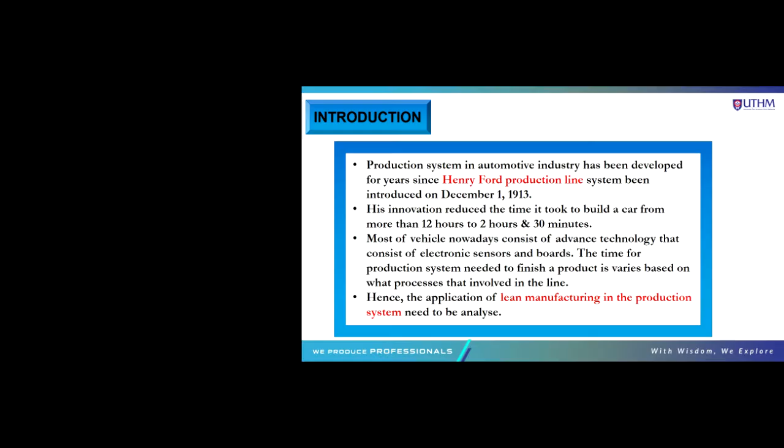For the first slide is introduction. What we mention in introduction is production system in automotive industry has been developed for years since Henry Ford's production line system was introduced on 1st December 1913. His innovation reduced the time it took to build a car from more than 12 hours to 2 hours and 30 minutes. Most vehicles nowadays consist of advanced technology including electronic sensors and boards, and the time needed for the production system to finish a product varies based on the process involved in the line. Hence, the application of lean manufacturing in the production system needs to be analyzed.

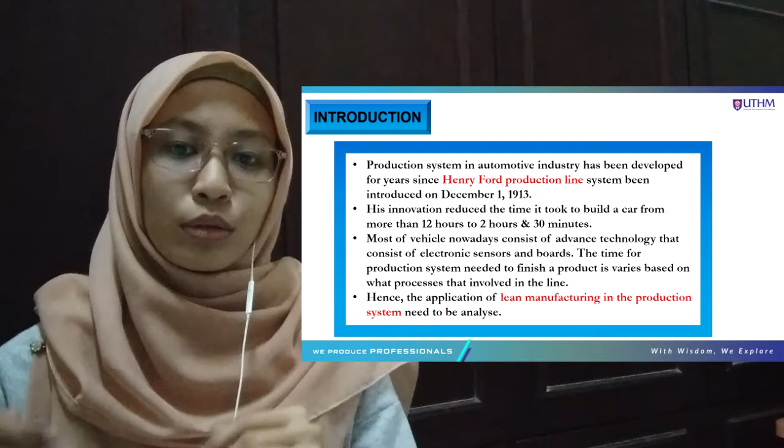For the next slide is background study. The aim of this research study is to learn the process involved in the production system in automotive industry from the initial stage of production until it finishes, which is mass production. So all the knowledge of how automotive vehicles are systematically mass produced and its relationship with the principle of lean manufacturing will be explained in detail in this slide.

Next is the objective of this topic. There are 3 objectives. First is to define the production system in automotive industry. Second is to state the process involved from the initial stage to the final stage, which is mass production. And the third is to examine the importance of the principle of lean manufacturing.

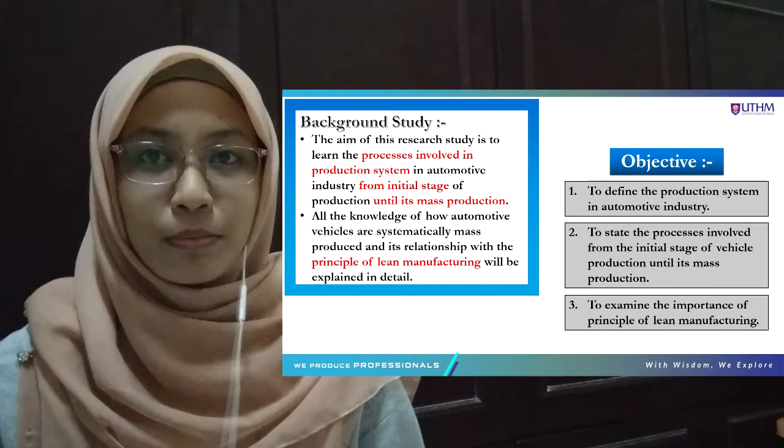Vehicle production system process. The manufacture of motor vehicle involves the manufacture and assembly of the final product from a number of metallic, plastic and electrical components. A wide range of processes are involved, including metal cutting, pressing, polishing, grinding, welding, and painting.

As we can see in the picture, this is the animation on how the assembly line in automotive industry will run. First, from plant and equipment relocation to the press shop, from press shop to the body shop, from body shop to the paint shop, and at the same time the powertrain shop or engine shop is assembled, and then the last one is final assembly.

The BMW 3 series has been chosen as our reference to explain all of the processes involved in automotive industry. The BMW Group offers premium emotion, exceptional automobiles which are characterized by high quality and outstanding design.

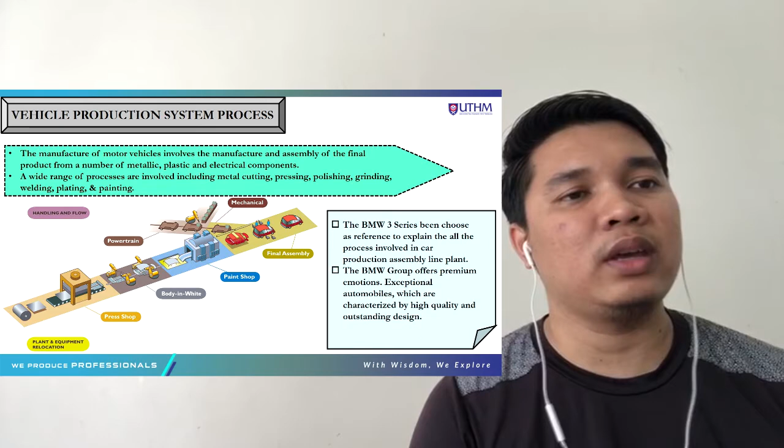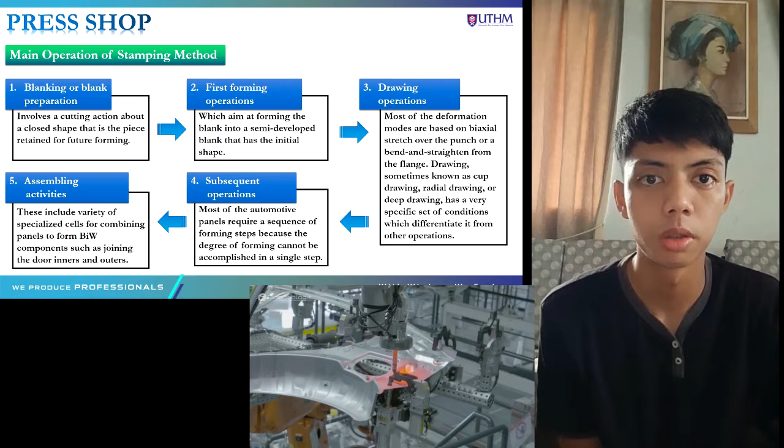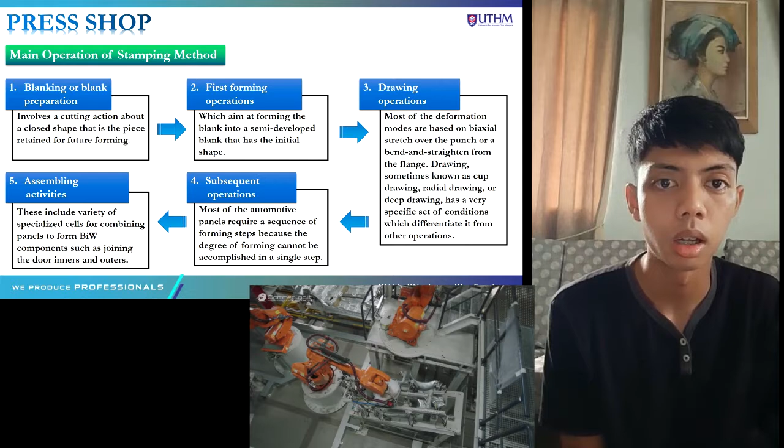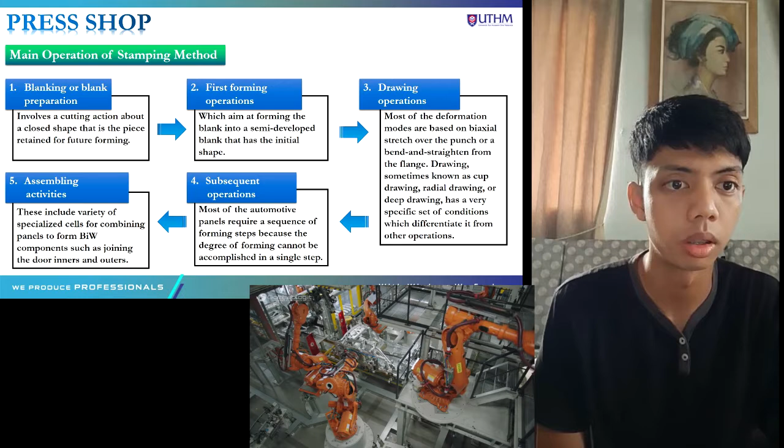The first press shop main operation is the stamping method. For the stamping method, there is blanking or blank preparation, first forming operation, drawing operations, assembling activities and subsequent operations. The first is blanking, which involves a cutting action to create a closed shape for future forming. Next is first forming operation, where the aim is forming the blank into a semi-developed blank for the initial shape before the drawing operation, which consists of what is sometimes known as cup drawing, radial drawing or deep drawing, each name having a specific set of conditions which differentiate it from other operations.

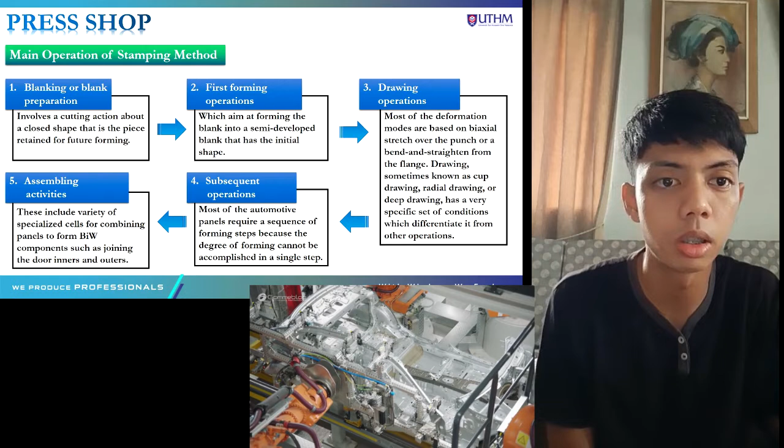The next is subsequent operations. Most panels require a sequence of forming steps because the different degrees of forming cannot be accomplished in a single step. The last one is assembly activities, which include a variety of specialized cells for combining panels to form the BIW component, for joining the door inners and outers.

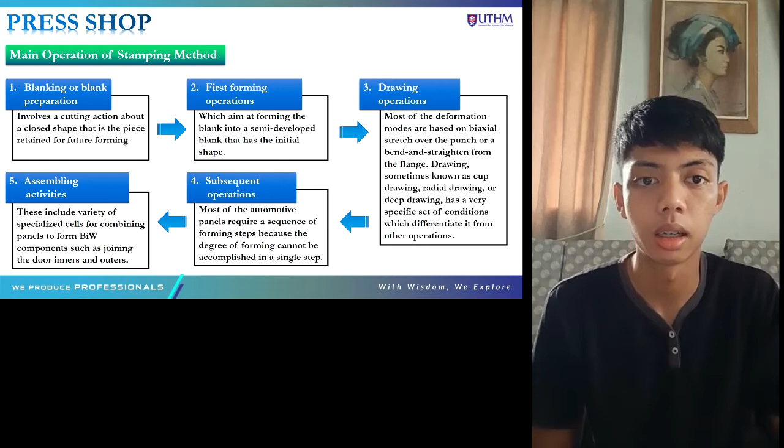In press shop, there are two types of press shop in automotive: the first is mechanical press, and next is hydraulic press. For mechanical press, it uses energy stored in their flywheel, which is translated into reciprocal motion. They also come in different configurations, which is press with gap frame and press with straight side.

Next is hydraulic press. They control their force which moves one or more rams in a predetermined sequence. Due to the large bed size, it provides full tonnage at any point of the stroke. The hydraulic press covers a wide variety of applications, so it is organized according to the operation on the part in various line configurations.

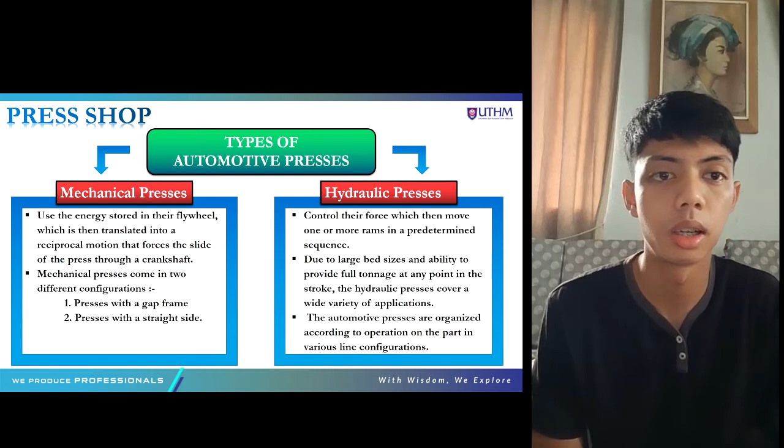So body shop is the next process after press shop. Body shop is different because it is meant for precise assembly to precision body, compared to press shop, which is preparing material for its initial shape from the sheet metal blank.

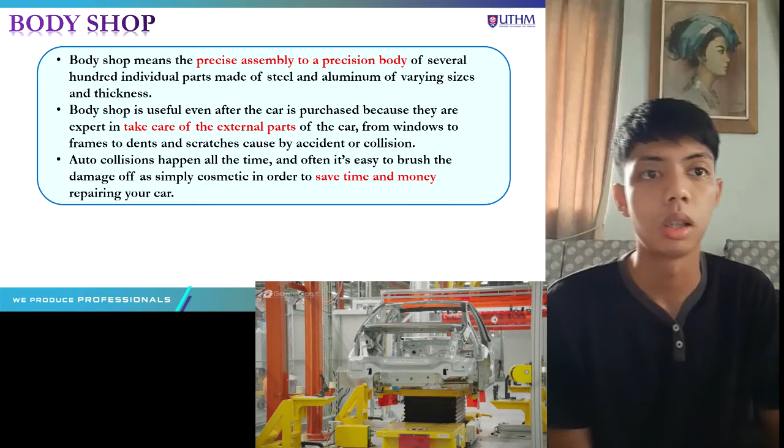Body shop is useful even after the car is purchased because they are expert in taking care of the external part of the car, which is the outer area. Auto collisions happen all the time, so it is not avoidable. In order to save time and money, we can simply use simple cosmetic repair by body shop for repairing the car.

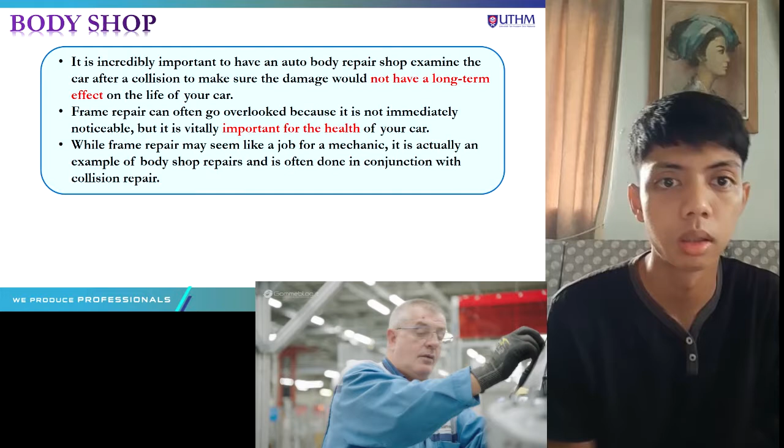So what is important about body shop? It is important to have an auto body repair shop examine the car after a collision to make sure that the damage does not have a long-term effect on your car.

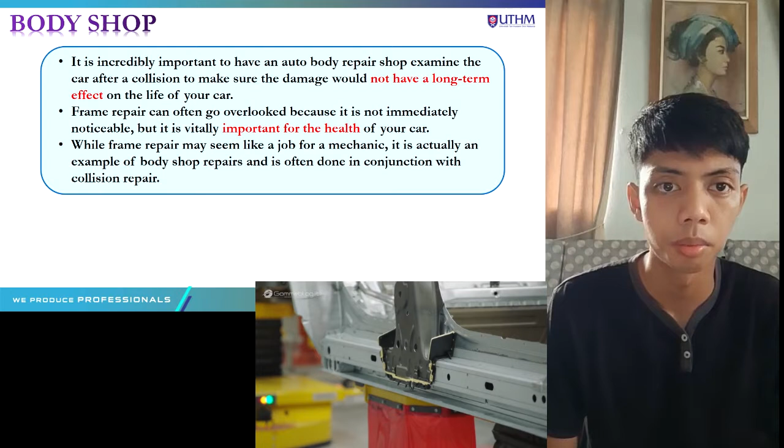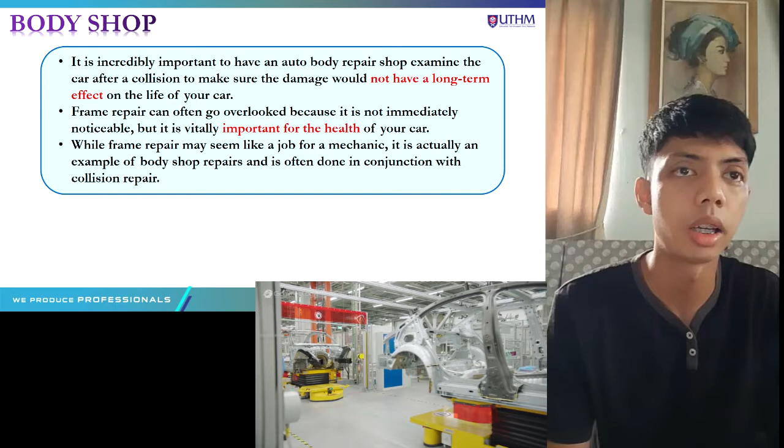Frame repair can go overlooked because it is not immediately noticeable, as it is on the interior side. Yet it is vital to the health of the car. While frame repair may seem like a job for a mechanic, it is actually an example of body shop repairs, often done in conjunction with collision repair.

Engine shop. An engine is a machine designed to convert other forms of energy into mechanical energy. There are different types of engines, like heat engines, internal combustion engines, external combustion engines, non-combusting heat engines, and chemically powered non-thermal engines, to name a few. Most of these engines are complex and heavy, which makes them difficult to make or build.

An assembly line is a manufacturing process in which you can produce an end product faster and with more efficiency. In this process, individual parts are added to a core product in a sequential manner to create the final product.

Automated assembly lines for engines have even found their place in the jet engine industry, where until now the engines were assembled almost completely by hand. Today, even automobile engines have become more complex, while workers demand more reliable and safe assembly processes. This demand has led assembly lines to gain great popularity in various automobile manufacturing companies.

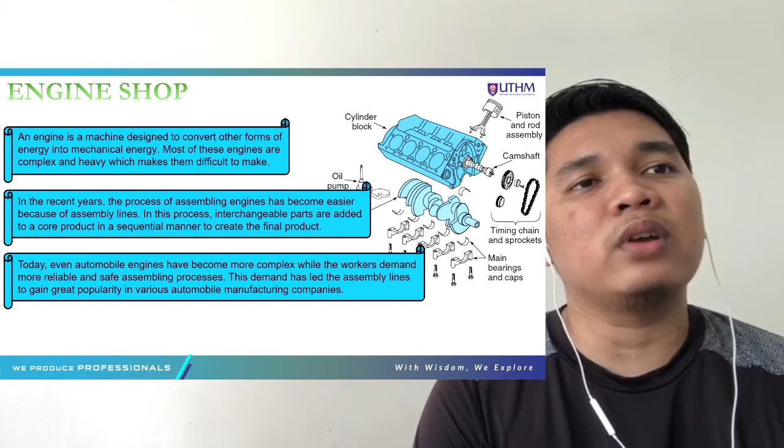The assembly line for engines has four major blocks essential to the engine. The first is short block assembly. The short block consists of the portion of a cylinder block from below the head gasket to above the oil pan. The cam-in-block engine also consists of the camshaft, balancing shaft, and timing gears along with the cylinder block. At this station, the short block is put together from all the individual components and then sent on.

The second is piston sub-assembly. This block contains the individual items required to assemble a piston. The main components of a piston are lands, heads, ring grooves, and skirts that are mounted on a wrist or piston pin. Though the structural components stay the same, the piston can differ in the shape of the heads or the placement of the rings.

Third, cylinder head assembly. The cylinder head sits on top of the cylinder block and provides space for the passage of air and fuel to the cylinder. In some cases, valves, fuel injectors, and spark plugs are also mounted into the cylinder head. All of these components are mounted at this station and then sent to the next station.

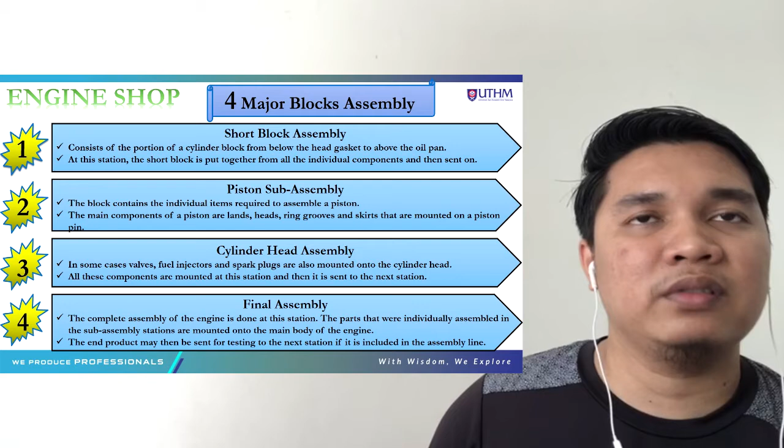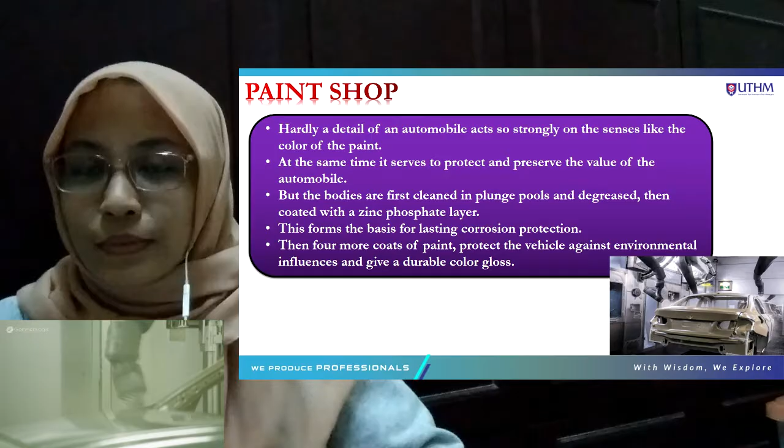The assembly line has various advantages apart from increasing efficiency and productivity. The line also makes mass production of products, even as complex as engines, easier, and also helps increase the company's throughput. So for the next slide is paint shop.

Hardly any detail in an automotive is noticed as strongly as the color of the paint. At the same time, it serves to protect and preserve the value of the automobile.

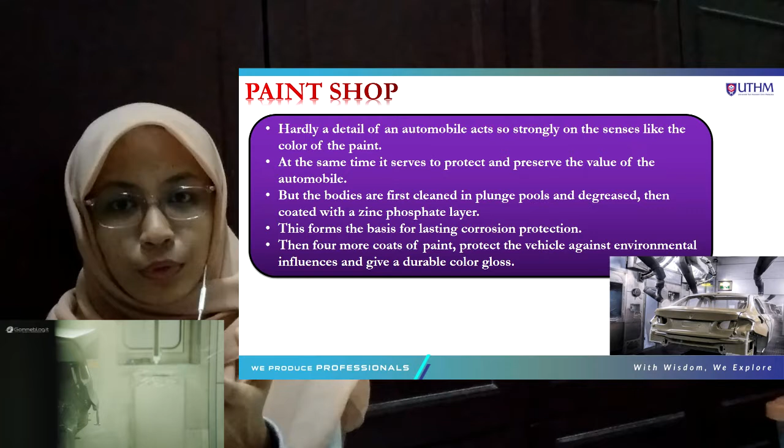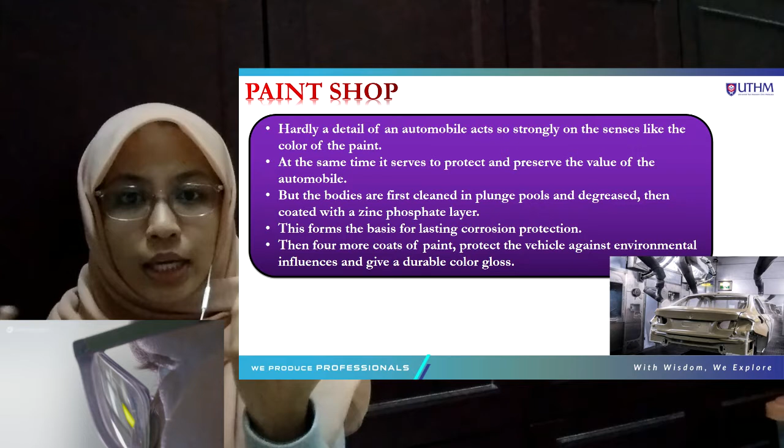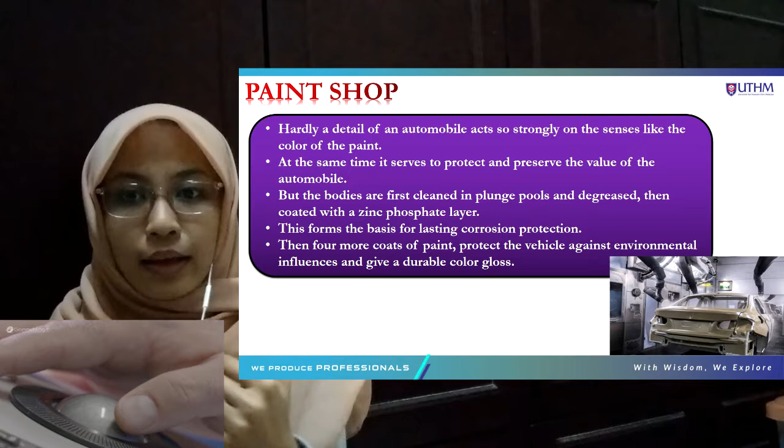The bodies are first cleaned in the plunge pool and then coated with the zinc phosphate layer, which forms a basis for lasting corrosion protection. Then 4 more coats of paint protect the vehicle against environmental influences and give a durable color gloss.

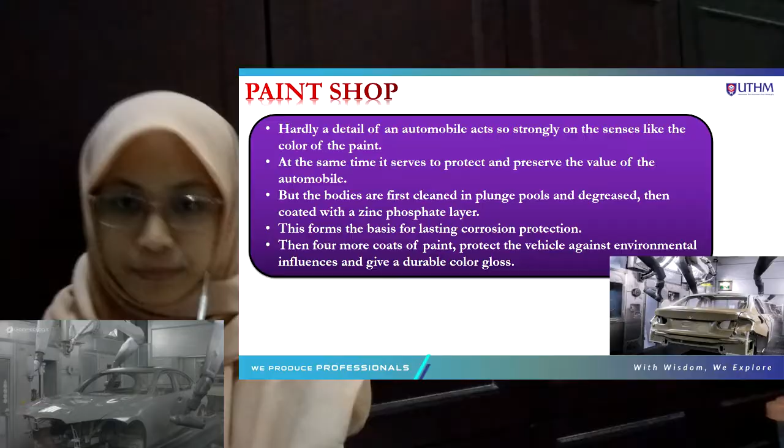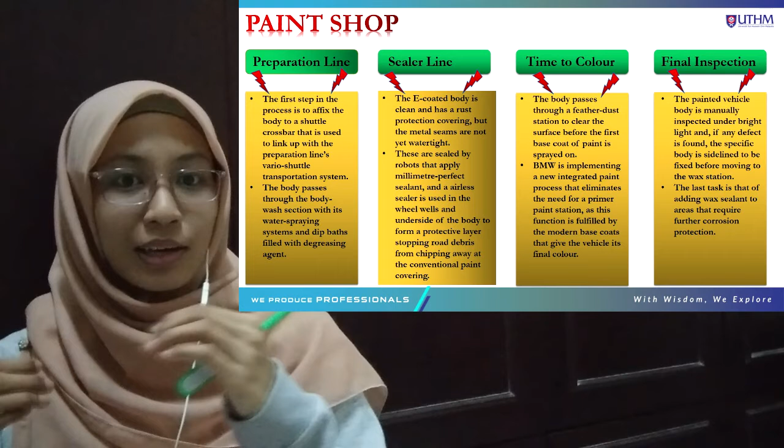So for the next slide is paint shop. The first process in paint shop is the preparation line, and the first step is to affix the body to the shuttle crossbar that is used to link up with the preparation line's vario-shuttle transportation system. The car runs on a track that allows the individual body to follow the path.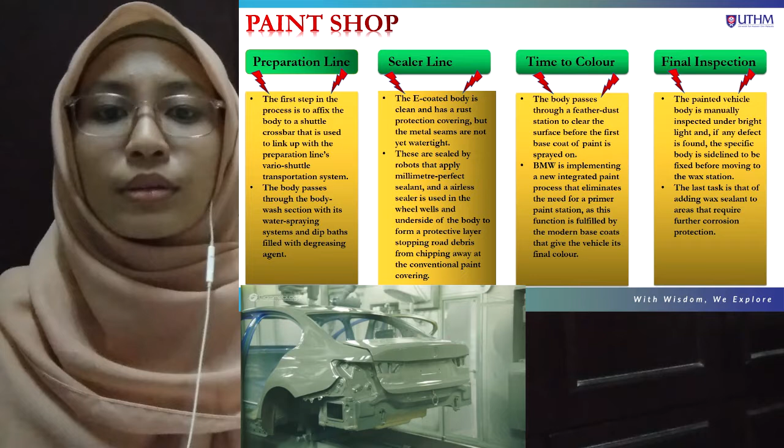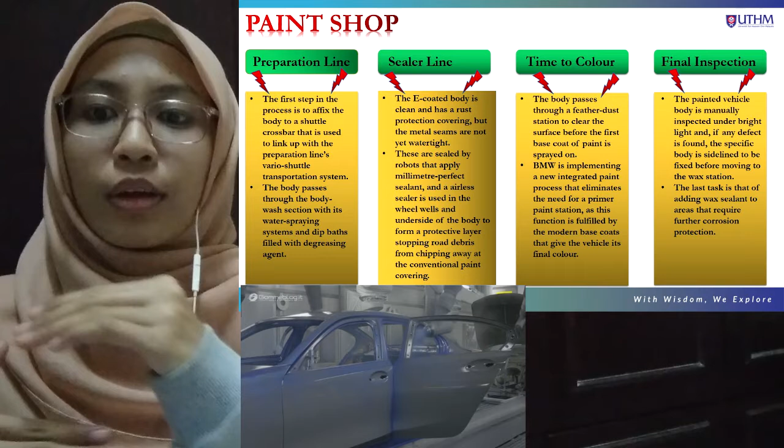The next process in paint shop is the sealer line. The e-coat body is clean and has a rust protection covering, but the metal seams are not yet watertight. These are sealed by a robot that applies a millimeter-perfect sealant and PVC covering, called airless sealer. This is used in the wheel well and underside of the body to form protective layers, stopping road debris from chipping away at the conventional paint covering.

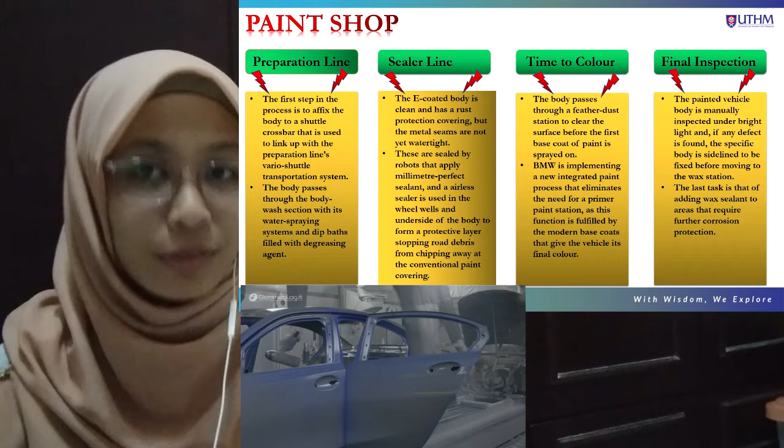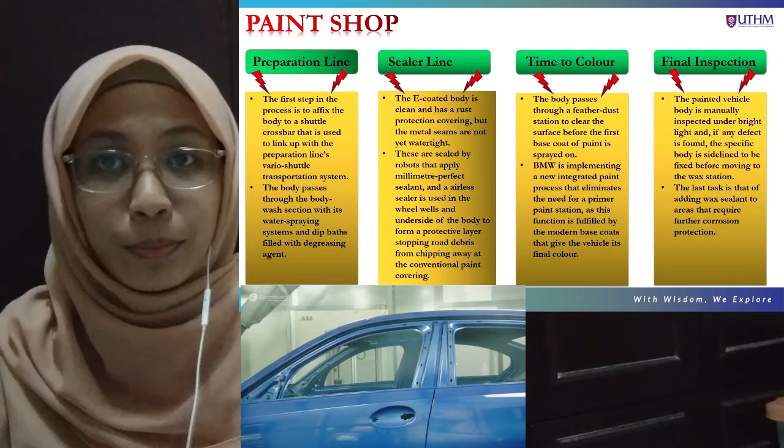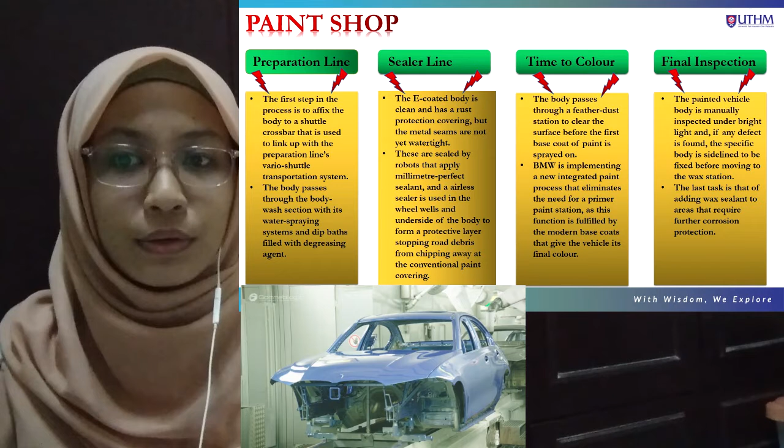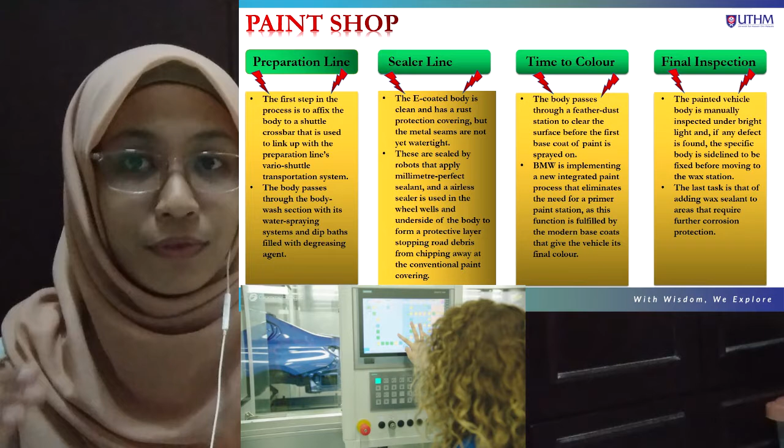The next process is time to color, the area of the paint shop where the real magic happens, where temperature and humidity are controlled. First the body passes through a feather dust station to clear the surface before the first base coat is put on. BMW is implementing a new integrated paint process that eliminates the need for a primer paint station, as this function is fulfilled by the modern base coat that gives the vehicle its final color.

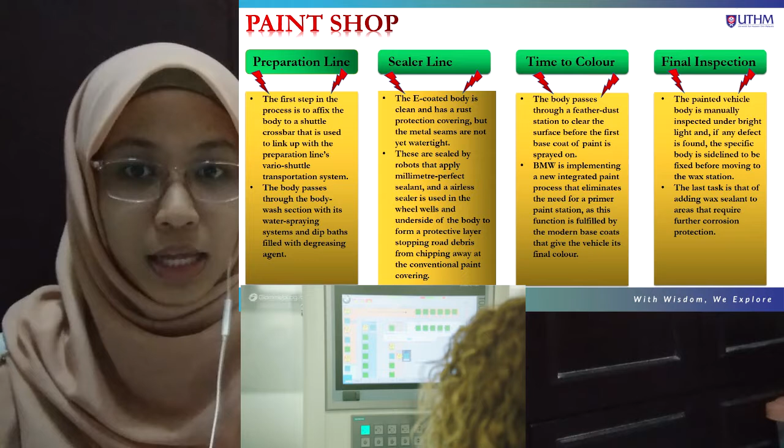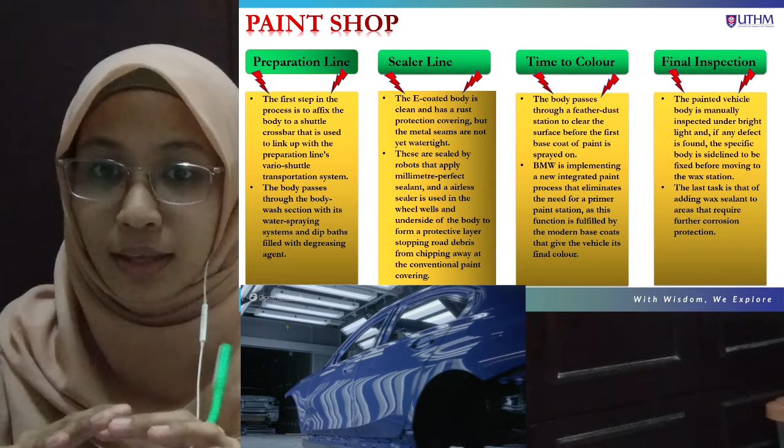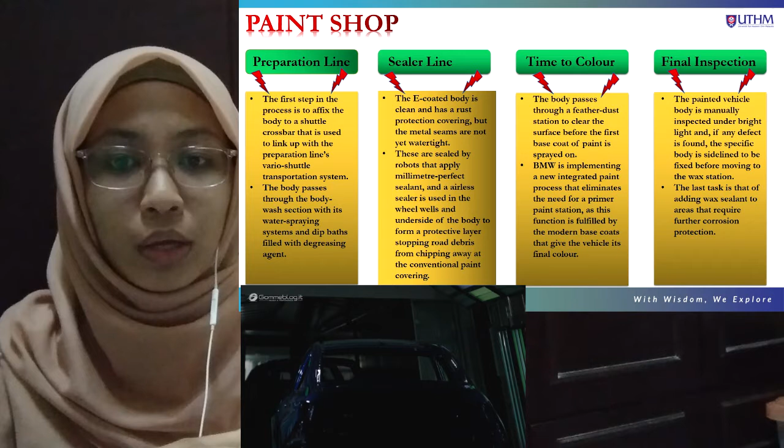This coat gives the vehicle its final color, and depending on the hue selected, up to 3 coats are needed to get the desired result, and everything happens in an airtight room, where robots equipped with extremely expensive state-of-the-art nozzles spray the body.

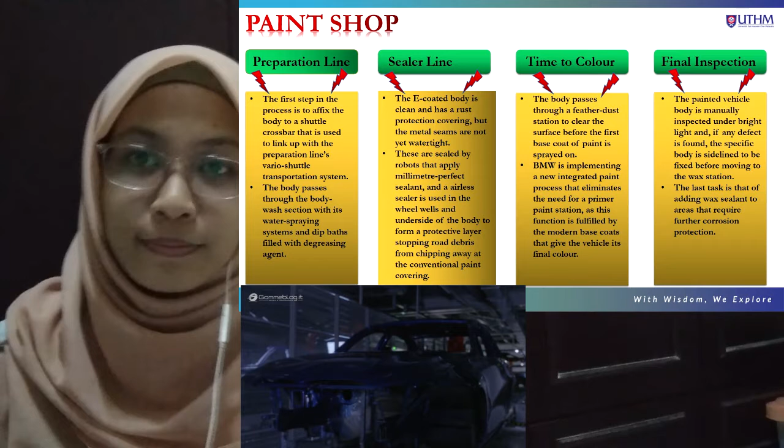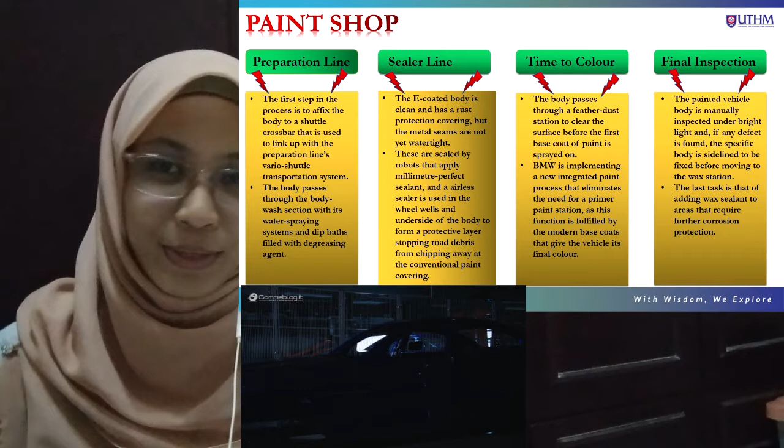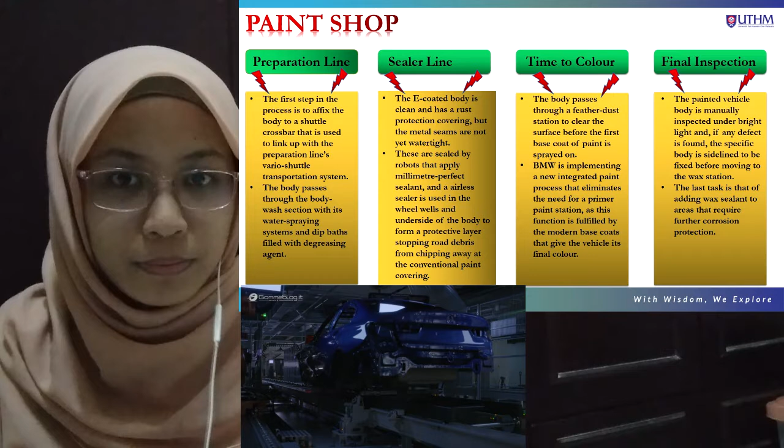The last process in the paint shop is final inspection. The painted vehicle body is manually inspected under bright light, and if any defects are found, the specific body is sidelined to be fixed before moving to the wax station. The last task is at the wax station, adding wax sealant to areas that require further corrosion protection. The very last task is the body is sent on its way to the vehicle assembly line.

Now I will explain about the assembly shop. First, in the assembly shop, an assembly line is processed from workstation to workstation, where workers add one part to another until the car is finished.

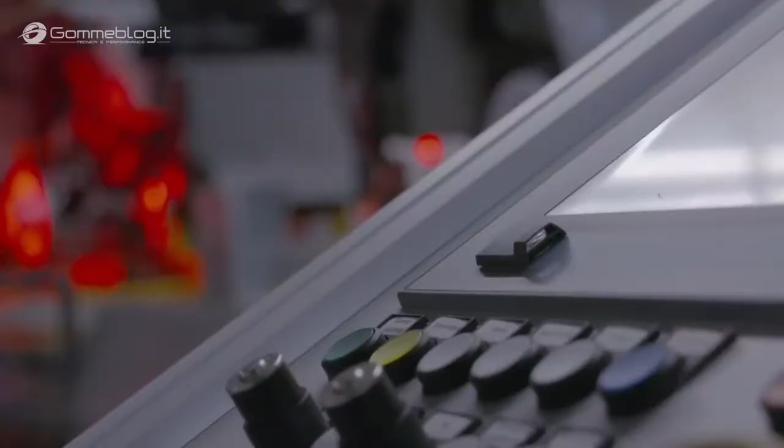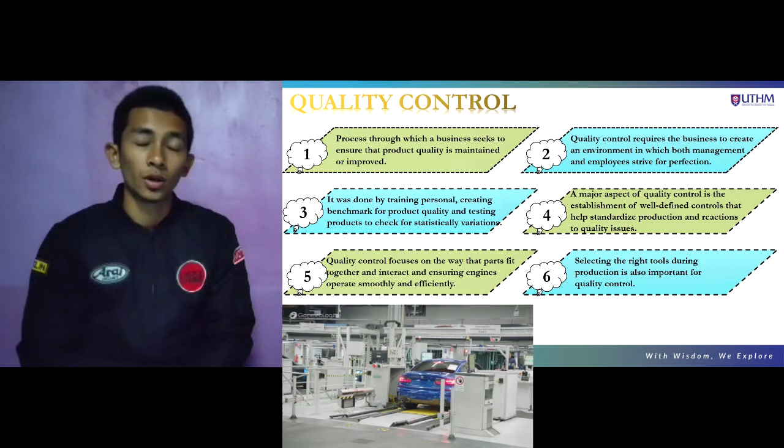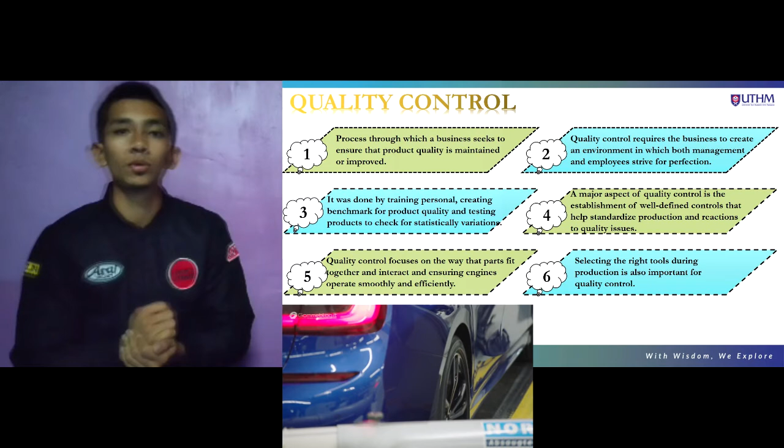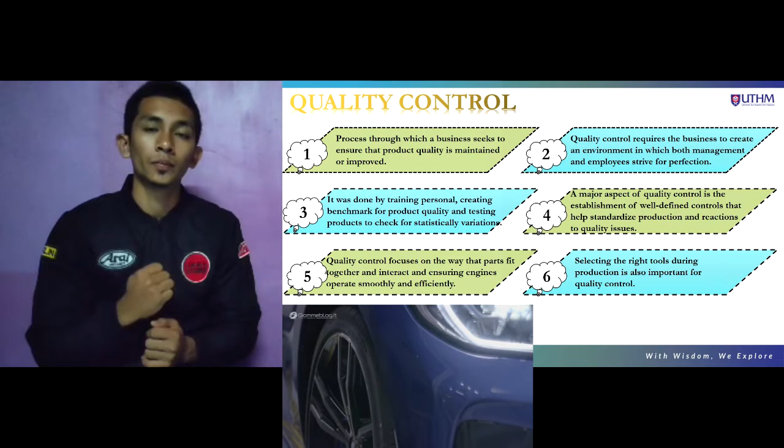For the quality control process, businesses seek to ensure product quality is maintained or improved; we want to control production and make sure it always improves and maintains our brand. Second, quality control requires the business to create an environment in which both management and employees strive for perfection. We want our product to be perfect.

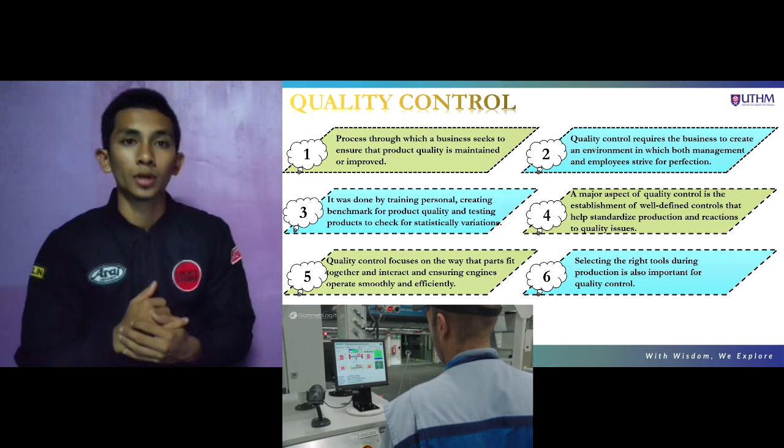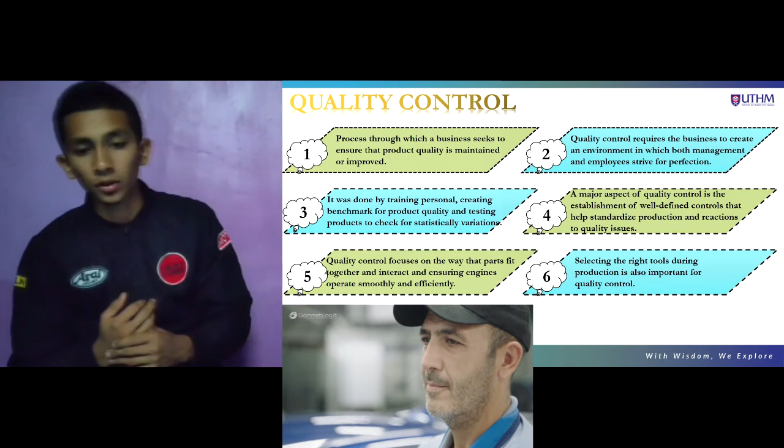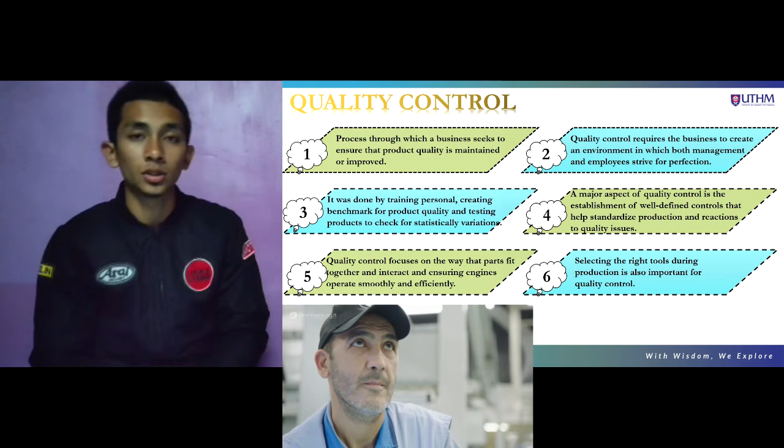Third, this is done by training personnel, creating benchmarks for product quality, and testing products to check statistical variation. Fourth, a major aspect of quality control is the establishment of well-defined controls that help standardize production and reaction to quality issues. Then quality control focuses on the way the parts fit together and interact, ensuring the engines operate smoothly.

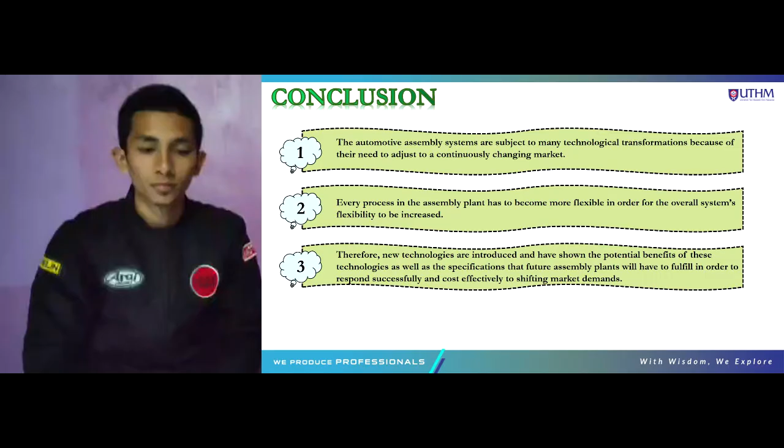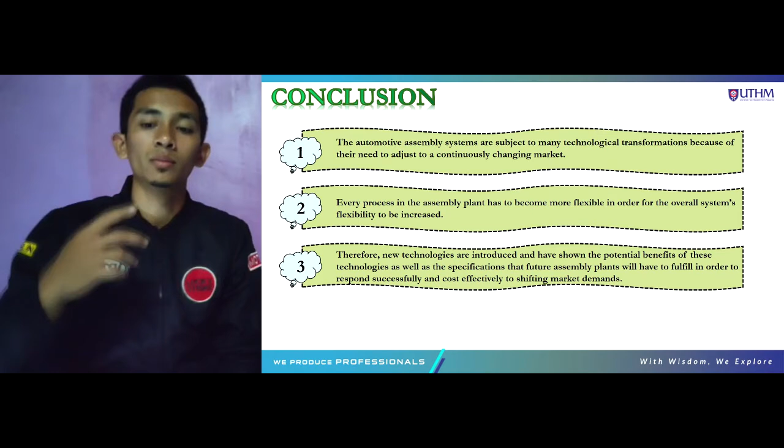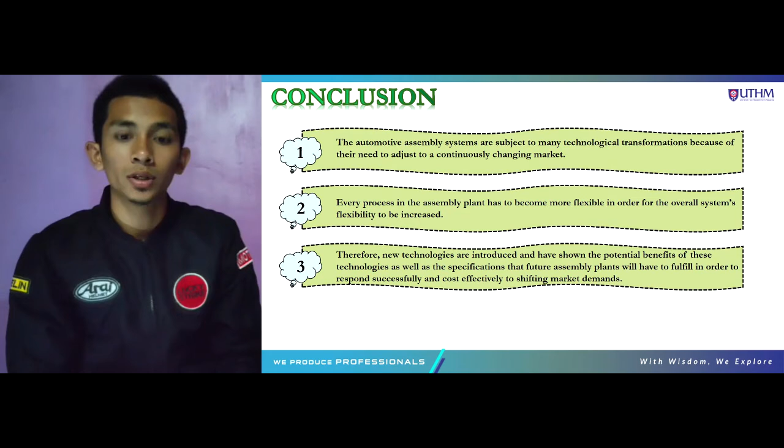Automotive assembly systems are subject to many technology transformation because of their need to adjust to a continuously changing market. Every process in the assembly plant has to become more flexible in order for the overall system flexibility to be increased. Lastly, new technologies are introduced, showing the potential benefits of this technology as well as the specifications future assembly plants will have to fulfill in order to respond successfully and cost-efficiently to shifting market demand.

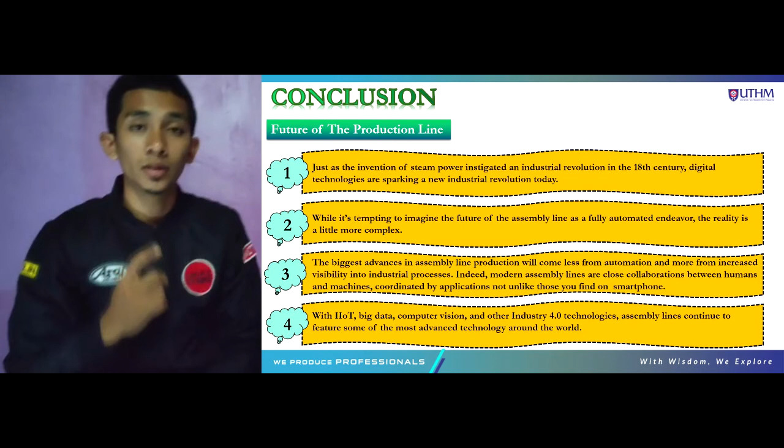For the conclusion, the future of the production line: first, just as the invention of steam power instigated an industrial revolution in the 18th century, digital technologies are sparking a new industrial revolution today.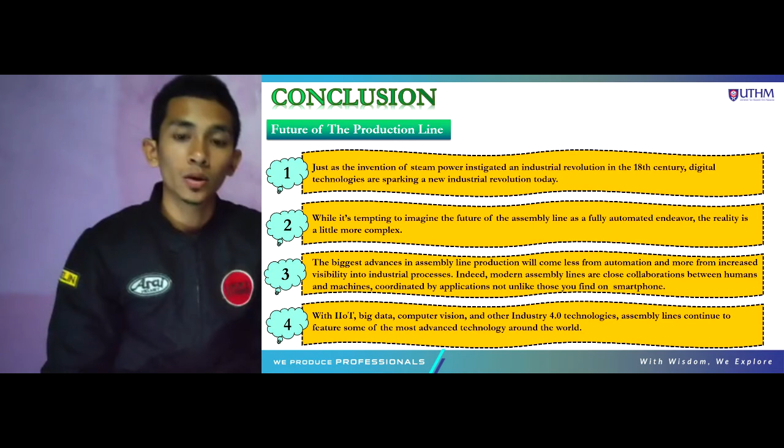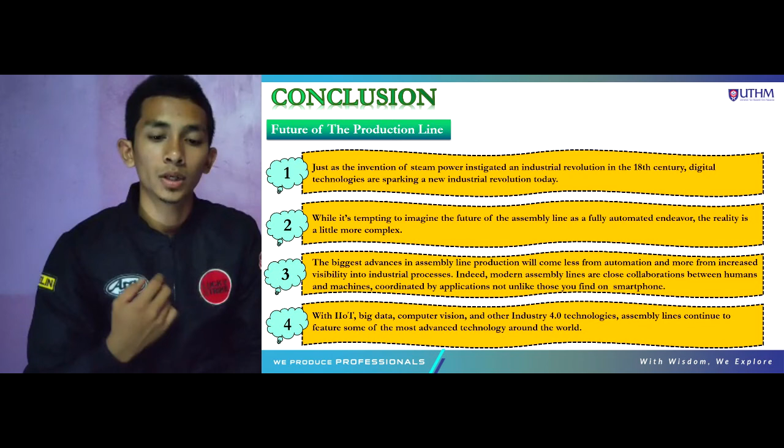Second, while it is tempting to imagine the future of the assembly line as fully automated, the reality is a little more complex. Third, the biggest advances in assembly line production will come less from automation and more from increased visibility into industrial processes. Modern assembly lines involve close collaboration between human and machine, coordinated by applications not unlike those you find on a smartphone. Lastly, with IIoT, big data, computer vision, and other Industry 4.0 technologies, assembly lines continue to feature some of the most advanced technology around the world.